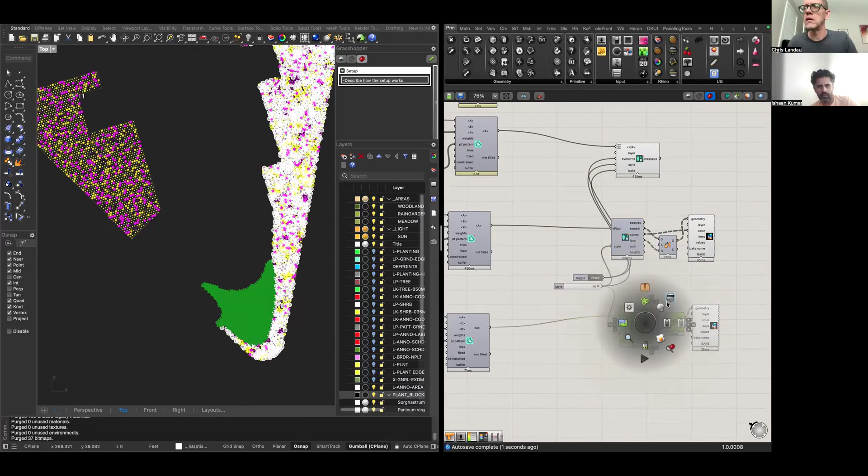So we've got these different colors, I know they're all the same color right now. If you want to re-download the CSV, just replace it. I changed the colors. Yeah, and you can do the hex values too. I totally did that. Download. Does it need the numeric pound? We'll see.

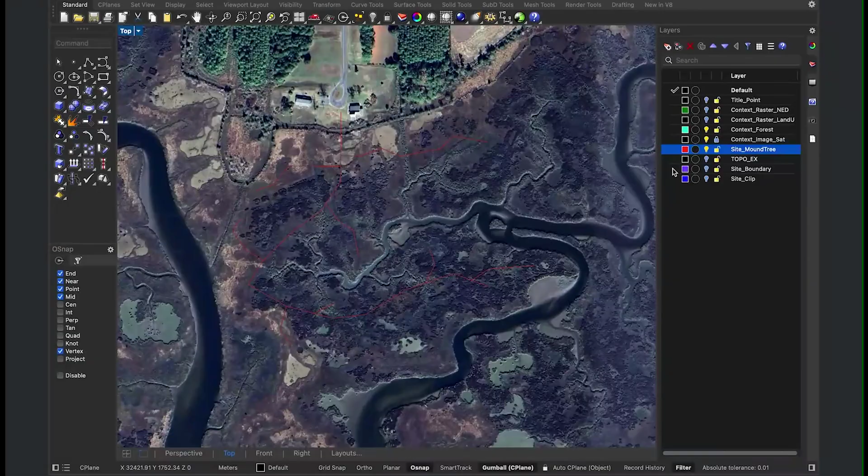Welcome to Kit Crashing, where we explore landscape architecture tools like 3D, parametric design, and AI. This season, I'm joined by guest host and landscape architect Ishaan Kumar. Ishaan brings the challenges, and I tackle them live, using computational design and my plugin, LandKit, to create better workflows.

Good morning, Ishaan. Hey Chris, good to see you again. You always catch me on Thursday mornings every other week. As you know, I get out of therapy, so I'm very zen today. My therapist asked me, 'Who are you?' Which is a very profound conversation, not for this space. But one of the things I said was, I think I'm a culmination of moments, and we're talking about legacy and what you leave behind as a father, as a person.

I just really appreciate this space, a moment shared, working in Argentina remote. I just finished a big deadline and I was looking forward to this, a space to connect with someone. You hit a milestone and there's no one to celebrate with, no one to grab a beer with, and this is just a nice space for me to learn, and hopefully we create a buzz around a community of people learning faster methodologies. So thank you. I'm excited for our shared space and the fact that we're sharing that with others, and that feels really great. Also, the sun came out this morning, so I'm feeling happy, and I've been cooking a lot lately and just feel good.

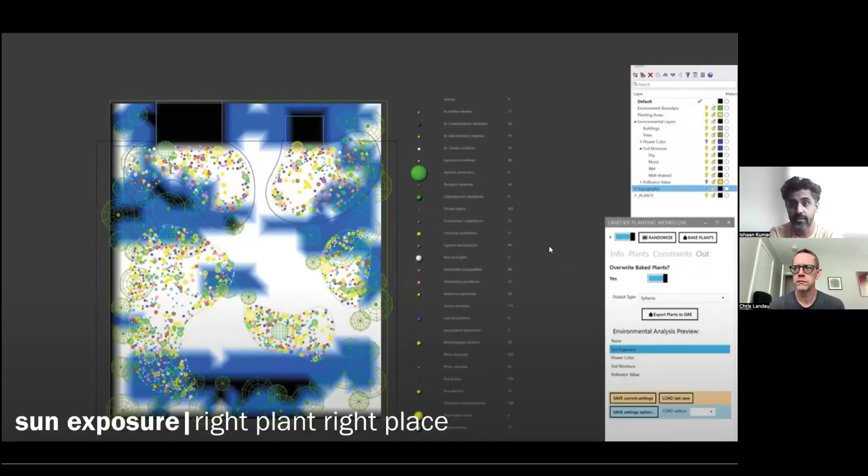I think it's fascinating that you guys have developed this, and you could base it on hydrological conditions, flower conditions, expand it to fragrance, fire tolerance, pollinator values. I'm not going to dwell on that because we cover it in the onboarding workshops, but it's incredible that you've opened up the conversation to where we are today in design.

I want to use this session to critique the way I work, the way I have worked, the way I've seen other people working. This is a far deviation from landscape with curated hedges and beauty, or monolithic blocks, or placing plant by plant and calculating how many of every plant there is, then updating a schedule, then the path alignment changes in CDs and you have to go back. I think we're way beyond this, but more and more clients are asking, inspired by this naturalistic look of Piet Oudolf and other active practitioners.

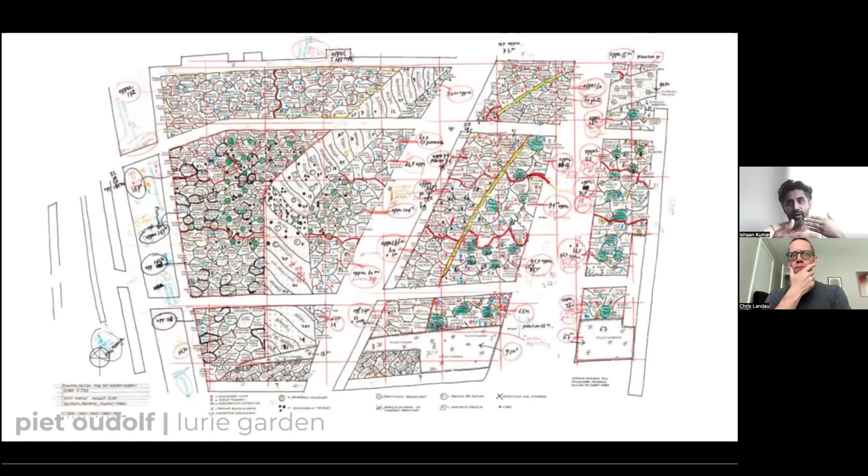But this requires another level of elevated plant knowledge, where the layering of one plant with the other matters. Piet, the way he works, prints out these plans to scale and knows that this blob is X square meters and it's going to have that many plants. These plants are beautiful, but they require a very high, elevated level of understanding plants and design. And I don't have that.

I'm trained as an architect. I went to Penn, I've worked at various firms that work in different ways. One of the things I've picked up is not necessarily learning a catalog of plants, but thinking about planting design as communities and mixes. This is something you and I have talked about. Looking at these images by firms that I admire, you could start to see patterns of mixes and zones that are trying to replicate natural conditions.

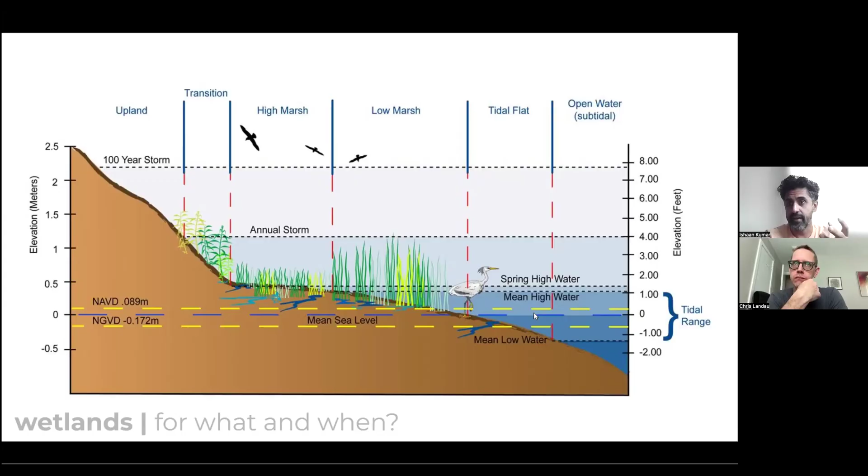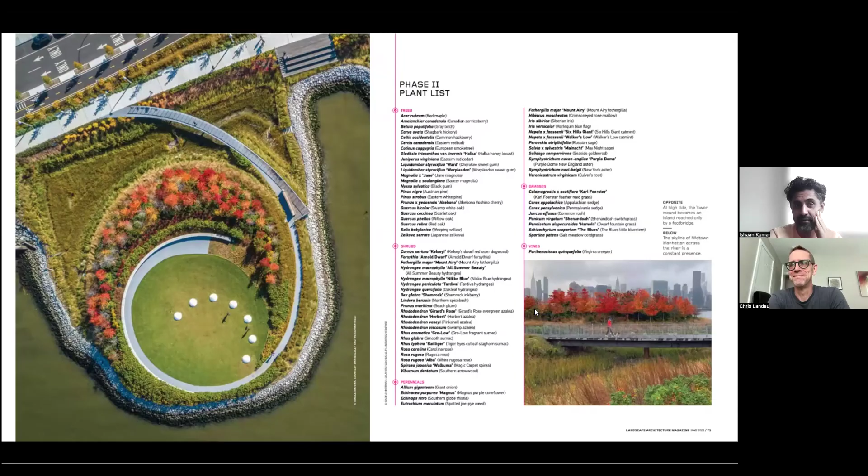As I said, I'm not the plant guru in the room, and someone once told me smart people steal from other great designers. I collect great plant catalogs of projects when I find them, and use them to refer back. This is one that I like to use in New York, where it has different zones, and each eco type has a mix of species - this becomes a resource.

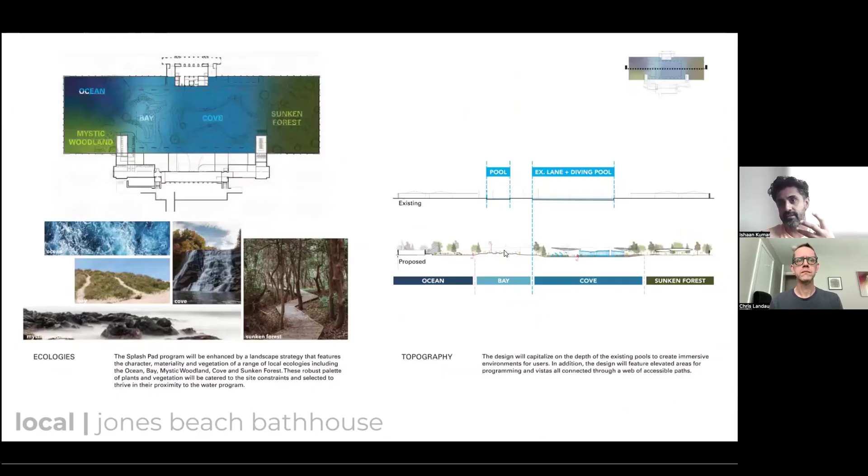This was a project I did at Local, understanding where it was in Jones Beach - understanding that it's near a salt marsh, a dune forest, a dune shrubland - and trying to bring those into tying that to the program, and tying that with a look and feel for the program. So this is the way I like to work, it's always in mix.

Today I want to focus on another Local project - this is almost like doing my homework for me. In this project, we're now in Nassau Community College. There's a bunch of existing trees, beautiful tall pines that surround this triangle.

The great thing about Nassau Community College is it has the only remnant of the Hempstead Plains grassland - the only grassland that exists today east of the Appalachian Mountains, and has very rare species, and it lives within Nassau Community College.

What I wanted to do in this project is have a series of mixes tied to the conditions that I had - pulling the Hempstead grasslands into this triangular plaza, doing a woodland mix under the trees, and then I added a rain garden as well.

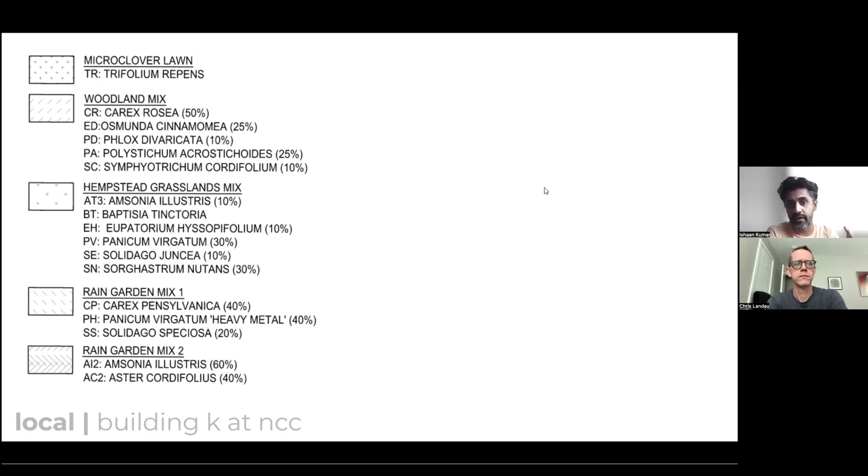At Scape, I learned Land F/X, which I think is extremely powerful because you get to delineate areas and say, okay, this mix is going to have X percentage and it's going to have this triangular spacing, and it gives you the quantity. So as the blobs are changing throughout the design phase, you're never updating the quantities.

This is something I've grappled with LandKit - I really value the right plant approach, but I also see the value of the mix. I think elevating this conversation to make it more transparent for me how to do that would be great, because it's been a doubt in my head, how to connect the dots. With Land F/X, you could set a zone and it gives you that quantity within that area.

And we're not - I think in our conversations you made it very clear that we don't want to be Land F/X, we don't want to replicate what they're doing. You guys have already worked with them, so maybe you could elaborate a little bit on those conversations that you've had with them.

Yeah, we've talked to them about some interoperability, because what we're trying to do is be a computational design tool, a placement engine, a tool for bringing analysis and planting together and thinking in terms of a holistic approach to planting design that can be scalable at larger systems, and even work at smaller scales depending on how you're working.

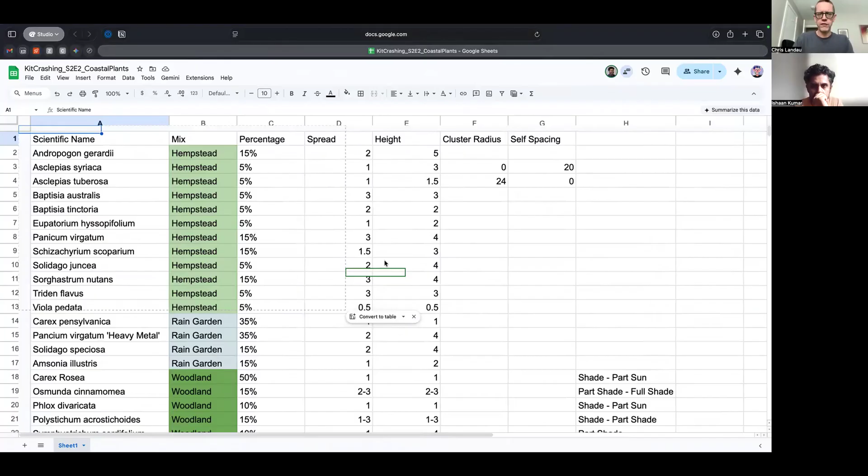So let's first have a look at the database - there's a couple things. If you want to adjust amounts for the mixes, these are our mix names, and the way we do that is we call it weight.

And then the only thing you need to do is remove these percentage things, right? I think it may also just get rid of those, but to be safe I'd just do that for now - if you could help me remove those.

And then spread - yes, that's going to be the full spread of the plant, the diameter. Is that the number you were using, or I just want to make sure you're not using the radius. Okay so yep, spread is going to be the whole diameter of the plant.

Just adjusting my video here. The one thing to look for is like this here - this is something you really want to watch out for. See what it did there? It turned it into a date.

You talked about something like that in a video and I didn't remember - it was something with the parentheses, that's right. And it's going to seem to our viewers like we just talked about it, but that was last week, so let's give Ishaan some credit. So what we're going to do is, instead of 2-3, we're just going to add parentheses here, and what that will do is make it so it's not a date anymore.

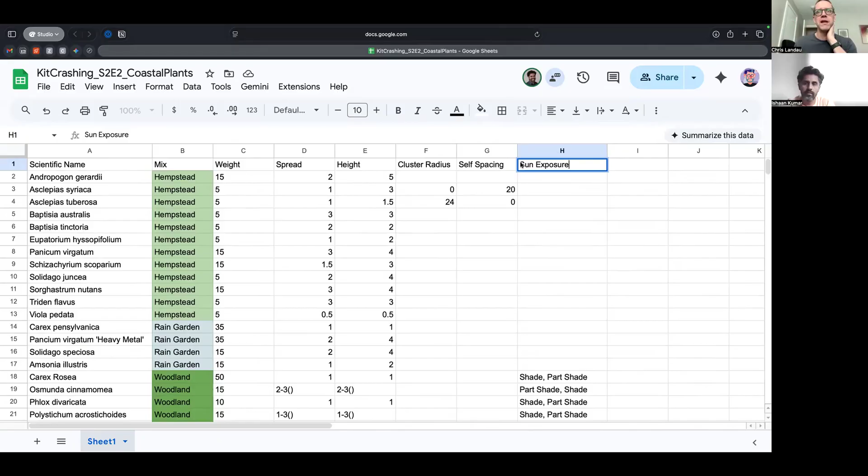Cluster radius is generally going to be the radius of the cluster of plants, and it basically creates a slight circular plant shape - it does diffuse the edge a little bit. If you want this clustering effect, it's going to be approximately this size, and it's always circular in form.

It is circular, but if you have a few of them, they're blobbing together, so sometimes you can't really tell. But if you want a really specific shape, that's when you begin to draw shapes and say put these plants in those shapes.

But the way we can think about it is if this plant wants to be basically edge to edge, those plants are going to be 20 feet apart - that's pretty far, like a tree. The spread of this tree right now is a very small tree.

No, they're all grasses and perennials. So if this wanted to, let's say we want to space this out and have 1 foot between the actual plant radiuses, between their circumferences, it would be one. Otherwise, if you have zero or nothing, they're going to pack together edge to edge. The neat thing is you can plant them according to their max size, or according to a smaller size, and then when they grow, they fill in more later. So there's different ways to approach that.

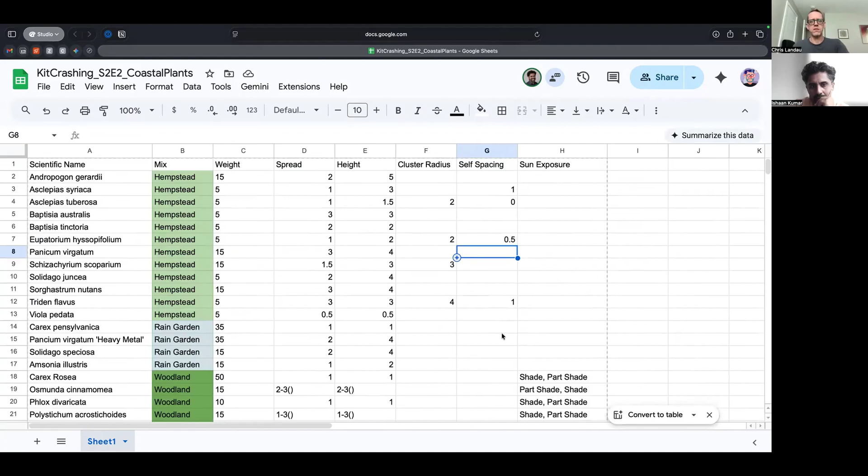So we can also iterate this, right? We'll probably go back to this database and be able to change it. So I'm going to download this as a CSV file.

Downloaded it to my folder. I'll pull that into my folder and keep the same name, so if I download it again, it just replaces it. And then I've opened up Rhino.

I'm calling this Coastal Hypernature. We might change the episode name, I don't know, we'll see. I kind of liked 'controlled mixes' - that was another interesting one.

So I'm just dragging in your L-PL, your planting plan. I have a few options - I can open the file, import it, or insert it. As we said last time, typically I like to insert, but I'm assuming this is just some boundaries.

Yeah, with hatches, so I'm going to import it. I'm going to be in inches, I imagine. Well, the file I'm bringing in is in inches, is what I'm saying. And then the layout units are, I guess, in...

Feet, right, to match the spreadsheet. Yeah, I think so - I think that might have been where we went wrong the other day.

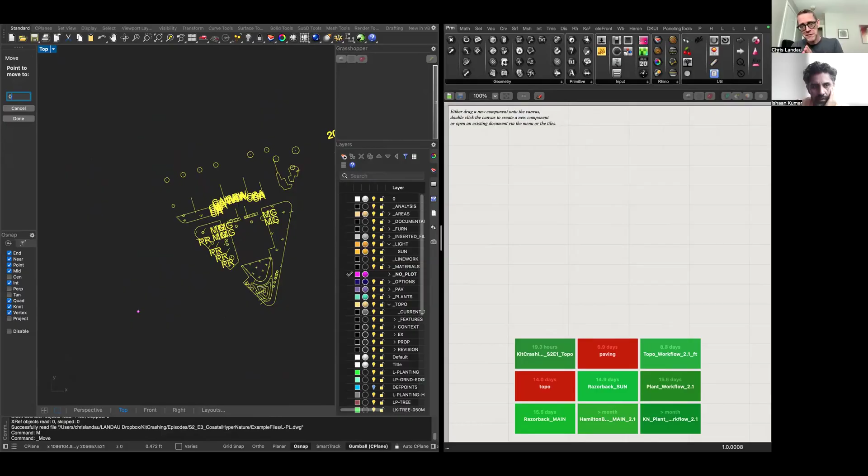So zoom out here - wow, where are we? We're over here. So typically what I would do is take all this stuff and move it closer to the origin. Do you mind if I do that? No, not at all. So I'm just going to do a move from about there to 0. If you just type 0 for a point, it's going to know you mean 0, comma 0, comma 0.

So if I now go zoom extent, I have this zone. What I'm going to do is select each of these. Let's just say this is woodland with some existing trees and blocks. This is the grassland, the meadow, and let's just make all of this the rain garden.

So let's work with those three areas. We could just draw blobs arbitrarily after that to show it in other areas. So I'm going to change this to woodland.

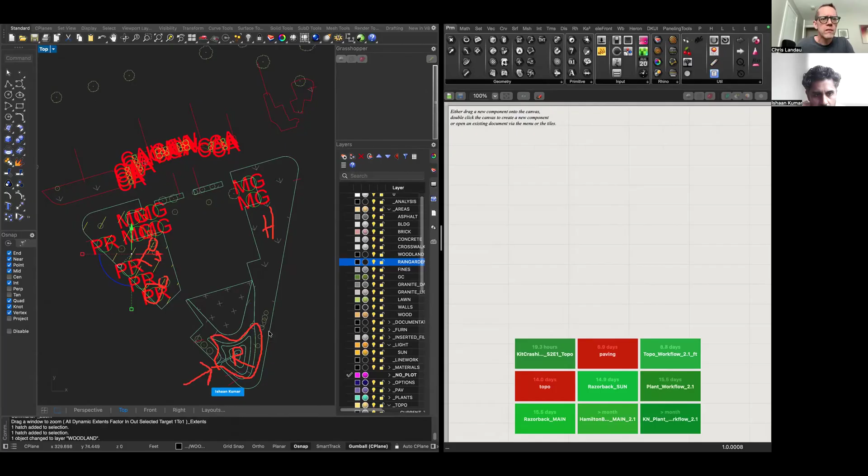And which one am I? Sorry, I kind of missed it. So woodland, and rain garden down here. And you have a hatch for that?

Yeah, you do. Okay, and then this one - that's lawn. This one with the H over here is the meadow.

So you only have three zones, only one zone of each, right? Yeah, and I think for now that's enough to start - it's good to visualize it.

What I like to do is quickly change my colors, so I'll show you how I pick colors with the color picker. I'll apply that, and then do my rain garden, which will be more lush, and then my meadow, which will be more tawny.

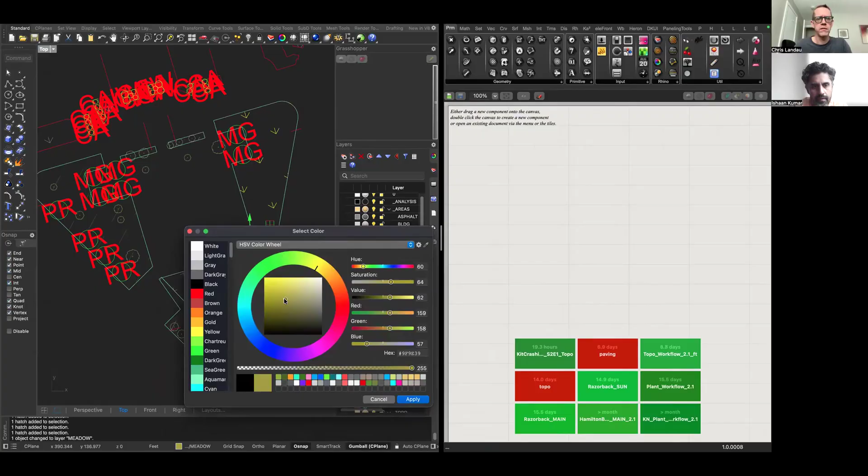All right, so I'll take all these elements and select them from all the layers at once. I'm going to go to the properties, and under my hatch properties, I'm going to make all these solid.

It looks like my rain garden doesn't quite fill in here. Is that curve correct? It was like a gradient tied to elevation. That could be another parameter. I would just draw a line there and curve boolean the whole thing.

Okay, so I'll do that. I'll do a line here for now. Or is that right? I'll just do it, close that up, and we'll use that whole zone.

And then what I do is I take these hatches, and if you explode the hatch, it becomes a surface - that's why I make it solid. If you explode a hatch that's got all the little pieces, it gives you all the little pieces, which we don't want. That's not helpful to us.

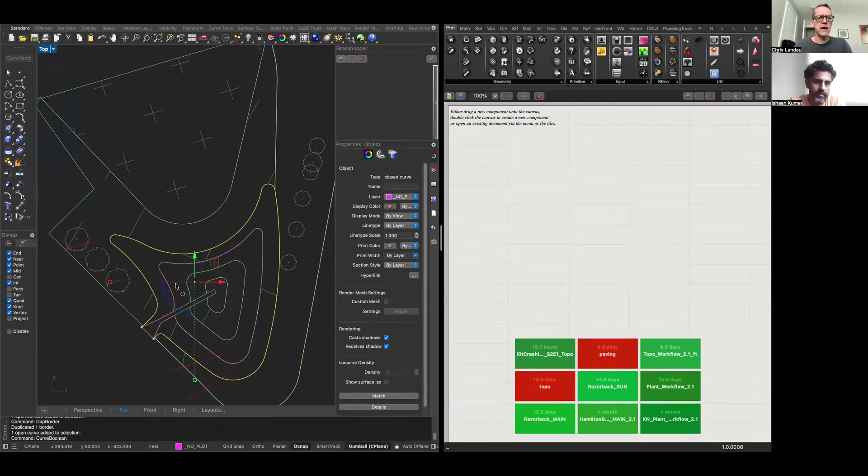So then I can take this and say dupe border, dupe B, and then I'll take this curve and do what's called a curve boolean. I can click where I want to fill in, hit return, and now I have a boundary.

But I'm gonna catch up and delete some of these things. So I'll delete this, delete that, delete this, and then now I should have one clean curve outline. You know what, maybe I deleted the wrong curve. There you go, that one - you want that one.

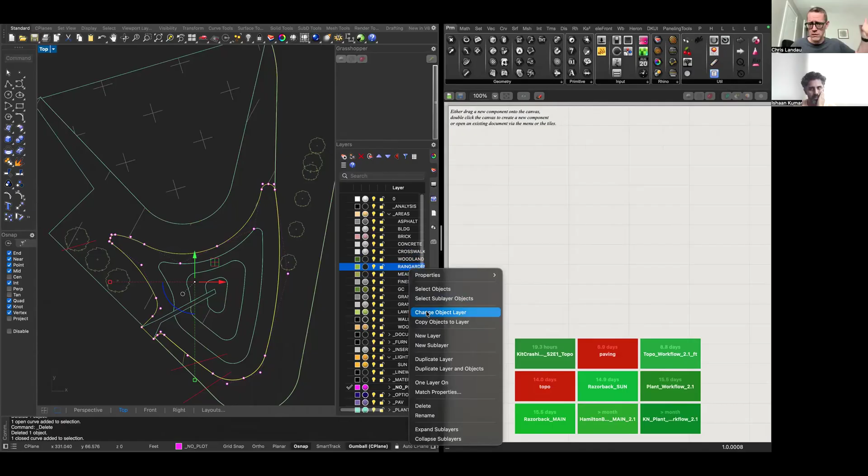Delete these, delete that. Now I have this. Okay, so I'll put that on the rain garden layer. And the other neat thing is that I can use a closed curve or a surface for an area, right? This is the same as we did with paving - change object layer, okay.

So I think now here I would think about it, more the way I'm comfortable working would be with curves or outlines, because then those shapes you can change instead of trimming the surface. Right, the neat thing is I can select my meadow - I like to be on the layer just to be sure - and then I say dupe border, and then I delete the surface.

Okay, I can do the same thing here. So I take this and go to the woodland layer. I say dupe border, and then we delete the surface. All right, so it's harder to see the surfaces - there's always a little bit of a trade-off.

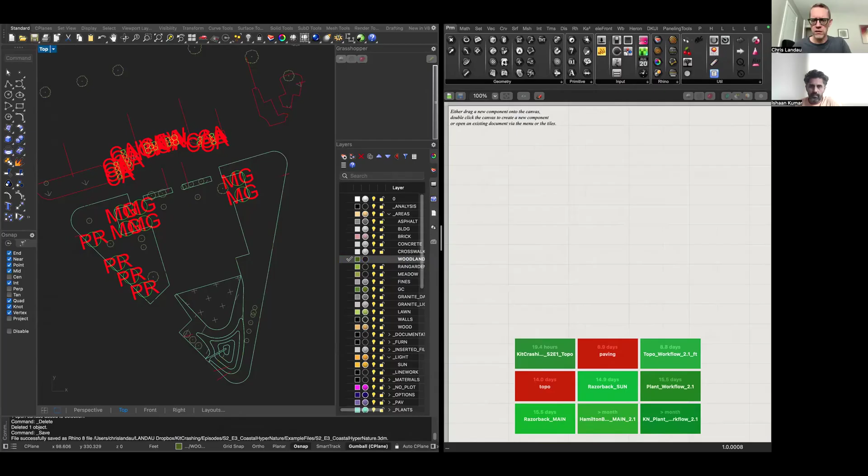There's ways we can fix this. So I'll hit save, and then I'm not sure how useful this is - no, I'm not going to use that. Oh yeah, I don't need all this. Delete all this. Phew. And then, have you guys ever seen these?

You can actually say delete placeholder. I didn't know you could right click and delete them until recently. But those are usually placeholders for a plugin you don't have installed currently, and that was just like an old version of Elefront or something I had in there.

So what we'll do - it's like, where do we start? This is sometimes how I feel like I'm just crashing into a project, right? This is one of the reasons it's called kit crashing. I just start to say, what do I have and what do I need to start doing? So I have areas, let's start there.

So we say, you know, we're going to do a layer pipeline, and then I'll do two forward slashes to get my panel outline going. I'll do my underscore areas, and then the two dashes or the two colons, and then I do a wild card, which is an asterisk. Sorry, that's so small, let me zoom in here.

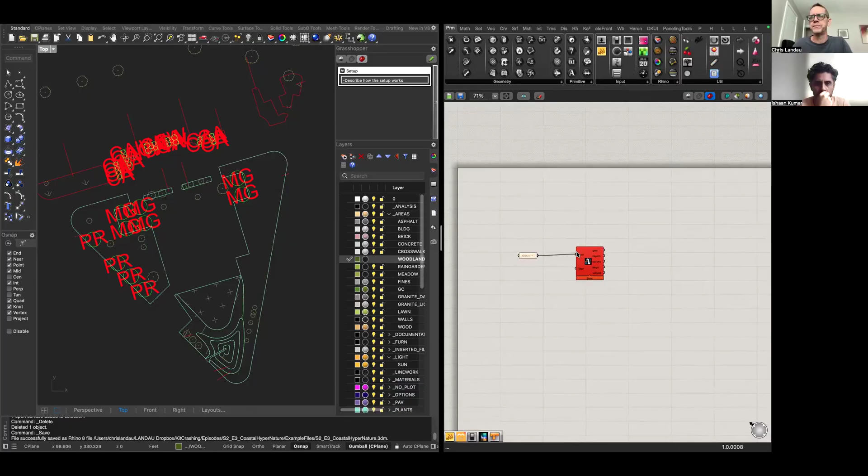I plug this in, and you can see that if I hover here, it brings in a bunch of stuff. It looks like it's bringing in a bunch of points. So just like with my template from before, I'm going to say show - I usually do this to clean up the file.

Yeah, let me try again. Show, select all these areas, select objects. Yeah, there's a bunch of points somewhere - oh, they're down here, somehow they got moved over here. Delete those. And now when I zoom into my pipeline, I only have three closed curves, which is the curves that we have in the plan.

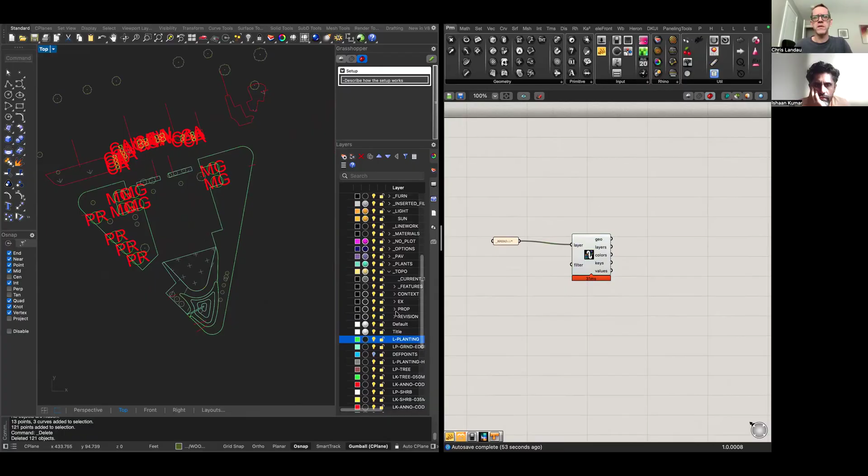Do you want to just turn off everything else? Yeah, we could, I guess that's a concern - it would hide it pretty well. Let me see. So because of the layer templates, the way I have them set up, all of the new CAD layers are down here, and I'll just turn them off. And now I see only the three zones. Perfect.

Yes, save. All right, I can do a quick visualization. I can say create an area, and then get the area stats.

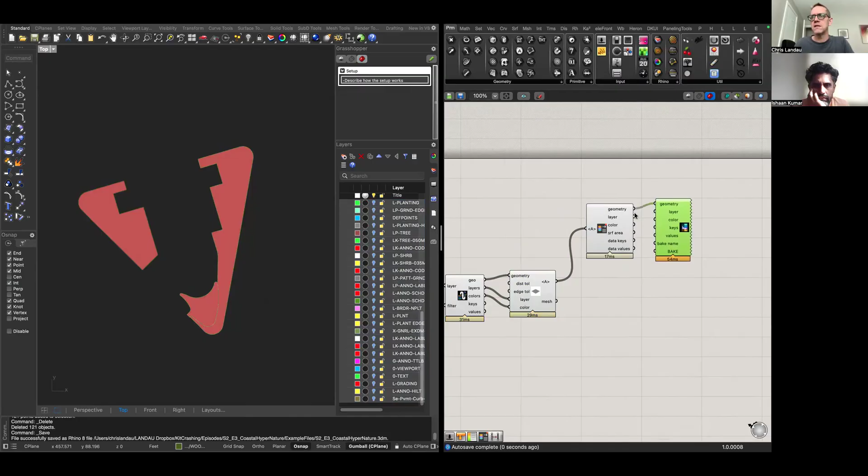There's a few ways to do this. I like inputting the data into the area and making sure it has all the data it needs. Then I can say bake plus, and visualize this as a color, and hide all this. So now I have the surface, these areas visualized.

So if I'm drawing on those layers and just doing the curves, as we said, I'm seeing those changes. This color is pulling the color of the layer here in Rhino. Yeah, nice, that's really useful.

This is one of the things we really liked about the layer pipeline idea, that we could pull certain things that are getting used all the time, like we're always using the layer name and the color name. Even with the new Rhino, you need a couple different components to pull all that information out of any given geometry. It just was heavy. So there were some reasons we did the layer pipeline, and that was one.

The other thing we did, as I said in the last episode, the paving episode, we could put collage in this area. So we could have these things layered and have shapes that are then being collaged according to their placement in space. We're not doing that here though, so I have these different areas and I've created the areas.

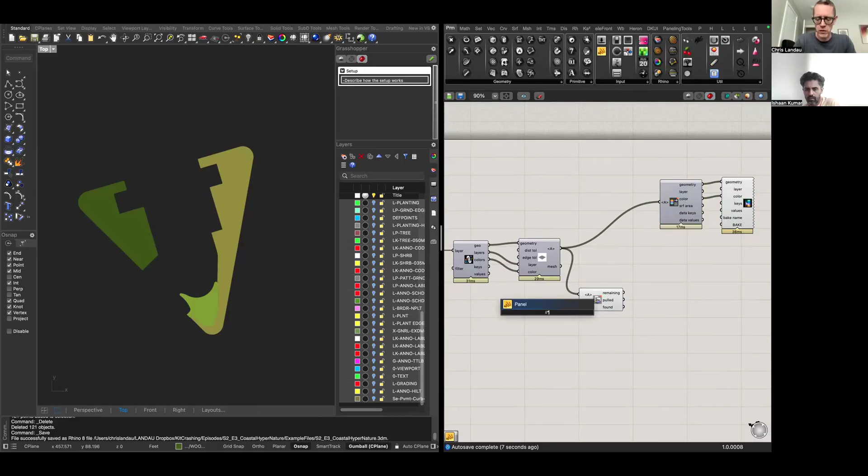Now there's ways that I can pull these now that they are areas. I can pull them by name. So I can say, okay, all the ones that are called, you know, wildcard. I think this should work. Meadow will go here.

Yeah, so it needs the asterisk. The asterisk says anything that happens before this doesn't matter. All I want is something that has meadow in the name at the end. You have to be careful because if you have your meadow layer somewhere else in your file structure, it might bring that in too, so that could be a problem. The other way to do it is just to say, to be safe, we're going to do underscore areas, two colons.

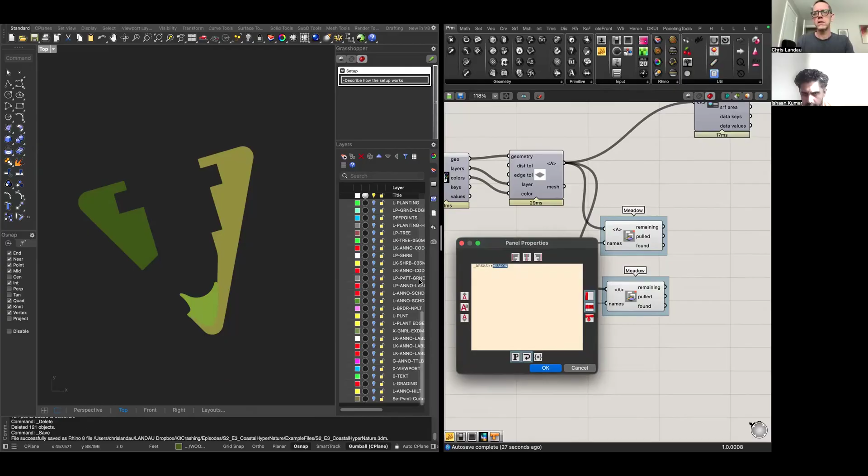And then I'm also going to group this, Control G, and just type meadow. We have it here, but sometimes it's nice to have the extra label so we know what's going on. So I'm going to do each of these. We'll do meadow. Did we call it... I think we called them meadow, woodland, and rain garden. Yeah.

Can I derail you for a second? Yeah, absolutely. Let's say I wanted to visualize the area, is that something that would be a key? What do you mean? Based on this outline, if we wanted a label there that said the area.

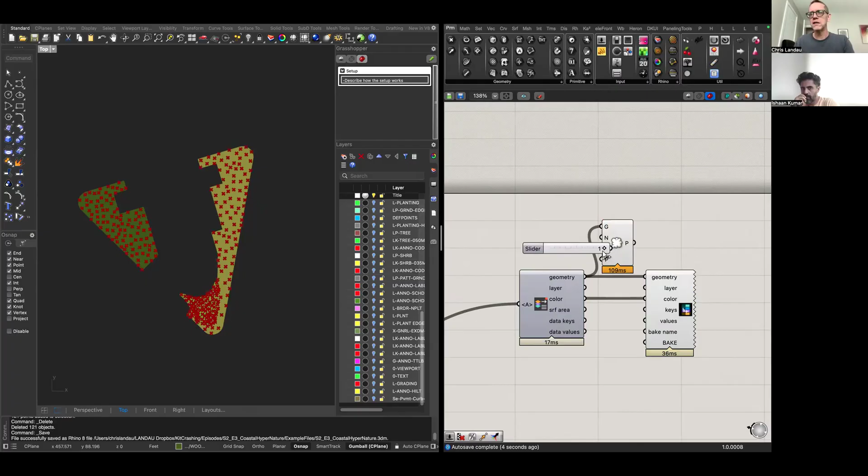So we can say populate the geometry. The typical thing you would use this for is populating with a lot of points, so it fills in 100 points per area. But if you just do one, it puts it somewhere on that shape, not necessarily right in the middle, but it gives you a single point.

And then we could say create text. We have this new bake text component, which I really like, obviously for my reasons. Then I can pull in the layer here of the text and plug this into the planes.

The one thing to watch out for is this is what's called fancy wires in Grasshopper, an option when visualizing things, under display, draw fancy wires. If you have a grafted tree of data, it's going to show the dotted line, so you can see here this is multiple lists of stuff. It does that because if it were 100 points, you'd want the 100 points for this branch and 100 points for that branch. But in our case, we know it's 1 point, so we can flatten this. I can right click on that output and say flatten.

So now I have one text per plane rather than three per branch. And then I can say that I want it to be white, and that it's going to go on a layer called ANNO—it could even be L, area, something like that. So I'm going to plug that into the layer, but also into a bake name, and the reason we do that is that every time I change it and it's baking, I want it to overwrite the old bake name. That bake name needs to be really unique, but because I know I'm just using this layer here, I don't need to worry about the uniqueness of it.

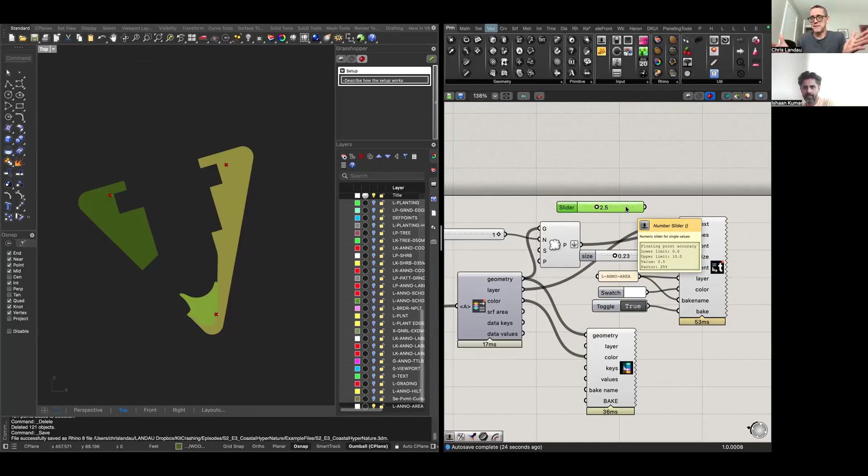So when you're typing the number, the level of fidelity is going to be based on the number you're typing in. There's ways to change the slider settings, but I like to do that. So I can change this and make this a little bigger here.

I'm really getting into the weeds here before we get into the actual planting. But no, this is useful.

This is another tool really fast that is a replace text. So the layer name—we can replace our underscore areas, get rid of all of this stuff, and just replace it with nothing. And then I'll plug that into text, and now I just have meadow, woodland, garden. If I hide this, now I've got these nice labels.

I can also adjust the font here too. So I could say the F is what you're removing, and it's just—I see, yeah, so it's find and replace. Maybe it doesn't have Helvetica. Might need Times New Roman.

And the text—would the surface area be the area of each one of these? The surface area, yeah, it's the surface area. So we wanted the area stats to be a way of kind of getting the underlying geometry, layers, colors, any data that's stored in the area, and then the surface area seemed like a nice, convenient thing to have coming out of there as well.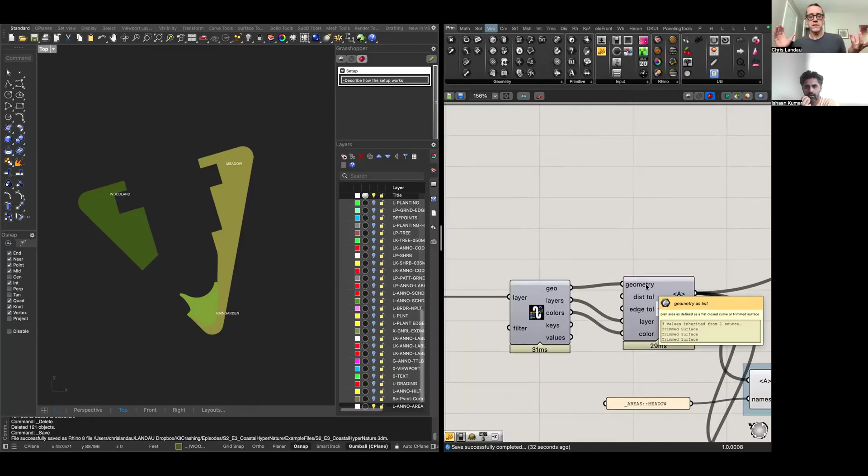What if it's not a surface? In our case, it's a curve. Well, every area—so when you input a curve instead of a surface, it's actually creating a surface. So when we were doing the paving, we were explicitly using surfaces because we wanted to make sure the surface was oriented properly. When it automatically creates a surface out of a curve, you don't know which orientation it's going to be.

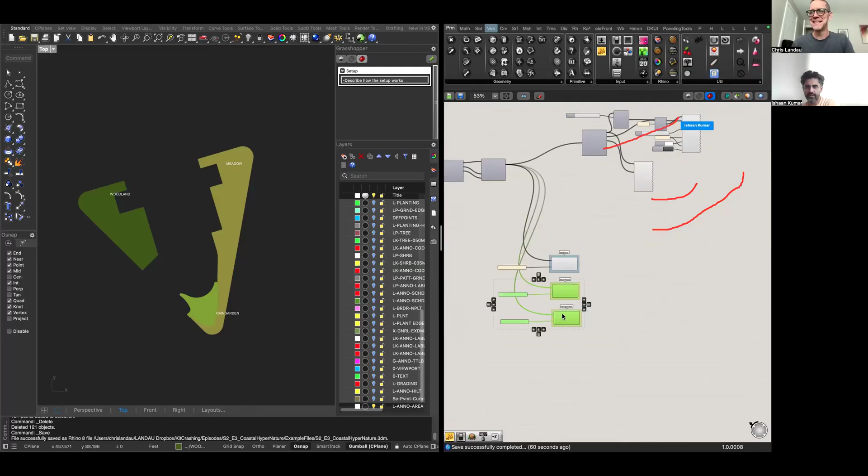So I know that has nothing, well, very little to do with planting. It actually will if we use any kind of patterning, which I think would be nice to use. If we're going to have to keep moving though if we want to get to all these mixes—all right, wait, last thing: surface area to text, that would give you the area of each zone.

So if we plug this in to here, surface area—we could just skip, we don't want to replace areas. So now, yeah, now it gives me a number. That's what I wanted to see. Great, okay, so you wanted the actual area of—

Yeah, because if let's say you're trying to get a certain square footage of planting that you want to have and you want to meet certain percentages, this becomes an easy way to visualize that without clicking and checking area. So this is super useful in terms of design percentages across a plan.

A big derail, but one that is really cool. Great, great, great that you could do this. Again, this is why we call it kit crashing.

So if we have a CSV, we downloaded a CSV of our plants. So I'm gonna create plants from CSV data. If I click on this, it's gonna take a second. Why is it taking so long?

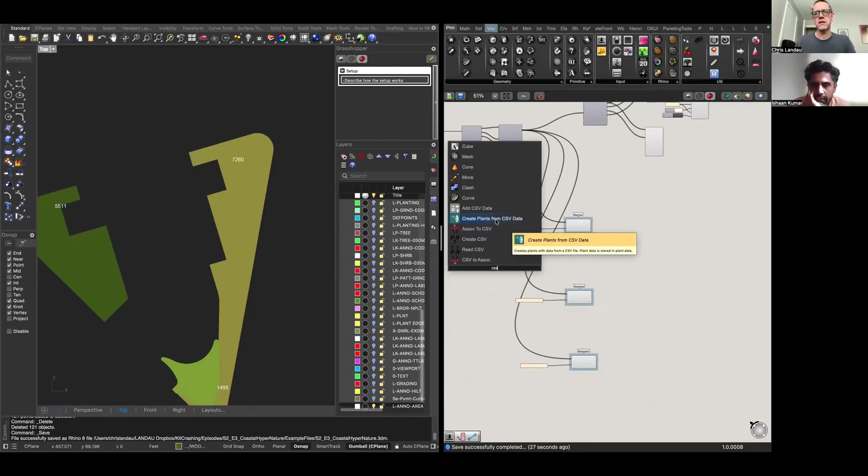Yeah, I think I know why. I think I might know why.

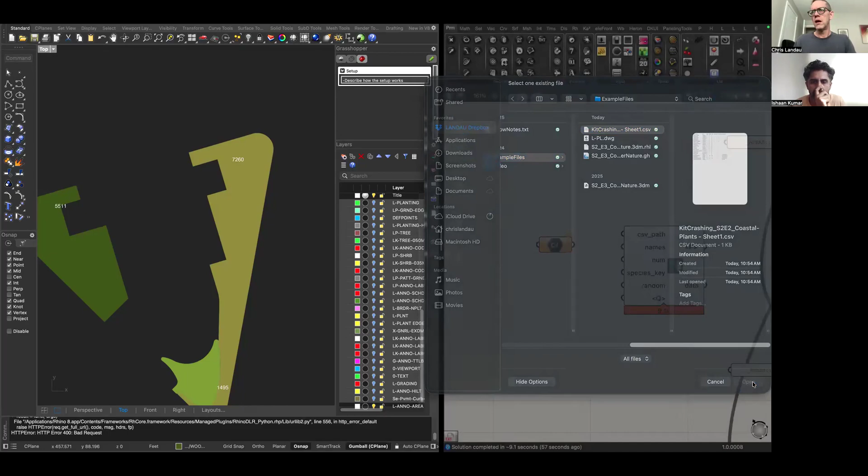We've recently connected an API to it that will bring plants in, but we're going to use the CSV. So what we do is a file path component - this is one of the input components for Grasshopper, like one of these container components. I plug that in, but first I'm going to set the path. So I say select one file, and then we're going to go to Kit Crashing, episode 3, Hypernature, our example files, and we want this CSV file.

And then we'll plug this into here. It automatically brings in all our plants. So all our plants are here.

Let's have a quick look at plants, because it seems like we're approaching this in a way that's new to everyone. So if we say plant data, we're going to get the current plant data. We plug this into here.

There's different things that we can get. We can get all the plant's attributes. And the plant attributes are things that we've either defined or were taken from the data that were recognized as things that can be used as attributes. I'll explain that in a second.

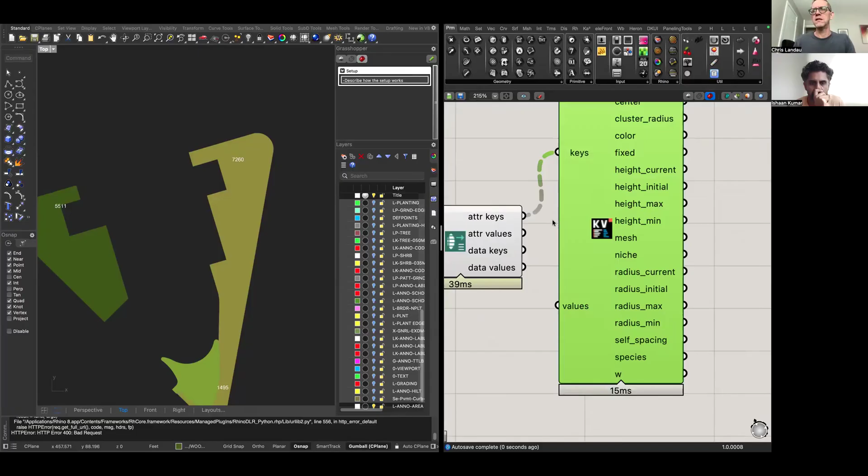So we're going to also do that. This is a new cool thing we've created called sort key values. It's an adaptive component that when you plug in the keys, it automatically creates outputs for all the values. And we plug in the values, and now those are all here.

So I can visualize these by saying, what is the area? There's a lot of things these plants don't have right now, but they do have current height, which has a corresponding max height column versus a minimum height column. This corresponds with that column that we put in the CSV file.

Yeah, exactly. So we have a radius max, a radius min, and that changes for some of these. And then we also have the radius current, which is usually what's used. So if you wanted to change those values, it's usually radius current. We also have W, which represents the weight.

So we have the weights for all of those that you input originally as percentages. The weight is cool because you don't have to do a percentage - you don't always have to calculate it. You could say, well, all these are a 1 with the exception of this one, which I want twice as much, so it's a 2.

And that's nice because if you add another species, you're not having to recalculate all your percentages. We like the recipe method here because you can add and subtract more easily. Species cooking - cooking with plants, which is a healthy thing to do. I recommend it.

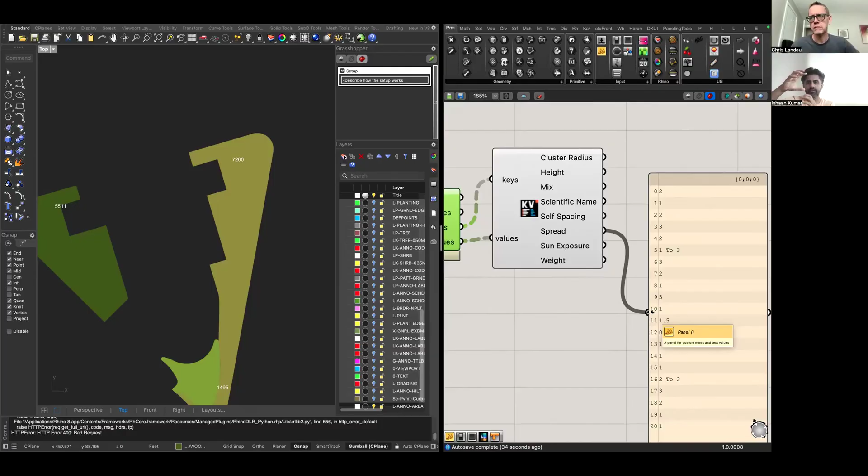Would you have two key value components, one with attributes and one with data? You could, but we're just doing this to look at what's in here, what's coming out. We're not going to pull all this data out, I don't think. There's some interesting things we're going to do.

So we can do this. We can pull, trying to think of the best way to do it. So we can get, let's get the attributes.

Also notice anything that's a range actually comes in as a domain, like 2 to 3. LandKit automatically recognizes whether something is a string or a number or a range, depending on how it came in.

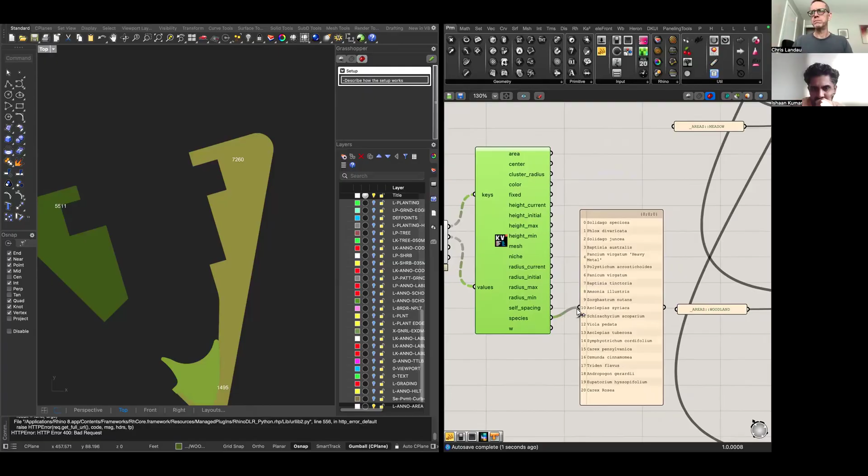That's another nice thing it does from a data perspective. So if I plug in the attribute keys and values, I just wanted to show you the data. And then I say the species, that's the scientific name. Okay, actually no, what I want is not—sorry, I'm messing this up.

It's the mix that we want. So the mix, we know we have this list of 3 things being picked from. There's a couple ways I can do this. Let's say I have a lot of mixes and need to sort this out in a data way. I can say create set, and that takes all of those values and says how many different things are there. What is the set? I can do it that way.

I also think that because we know and we're creating these very explicitly, I'm just going to do it by text. So I'm just going to say rain garden, and I'll say whether this—what's the best way to do this—I'm going to match text.

I'm going to match text. So if the text matches—I'll say I'm going to get a mix, here's the text, and then the pattern that I'm matching is the rain garden name. This tells me whether or not it's a match.

Then I can say cull pattern. So I say, okay, give me the actual plant and use the pattern here. This is going to give me plants that are in the rain garden.

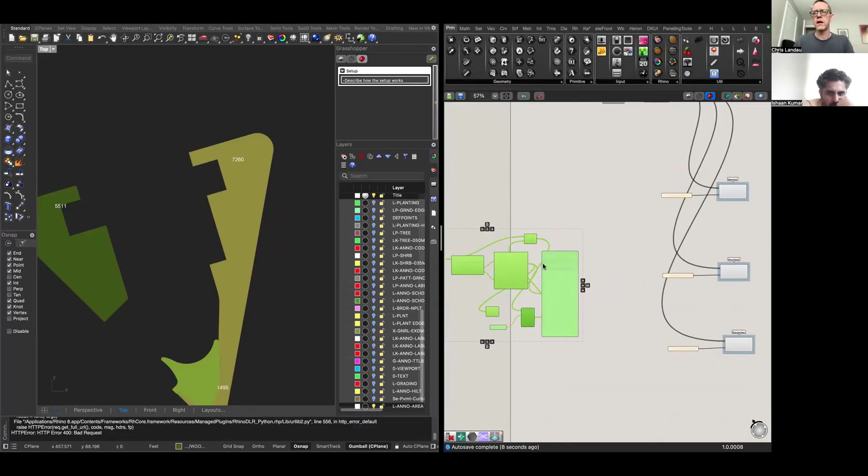All right, so that's a little messy. Let's untangle it. So I'll move this out of the way, pull this up here. We want tight little bundles of logic, right? We don't want our logic to be all over the place, spider and web—we don't want a bunch of weeds in our garden.

If I do, each of these is going to connect in some way to the list. I'm just looking at the order. So now I have these 3. They're in the right order, just so that when I go to grab them later, I'm not grabbing the wrong ones.

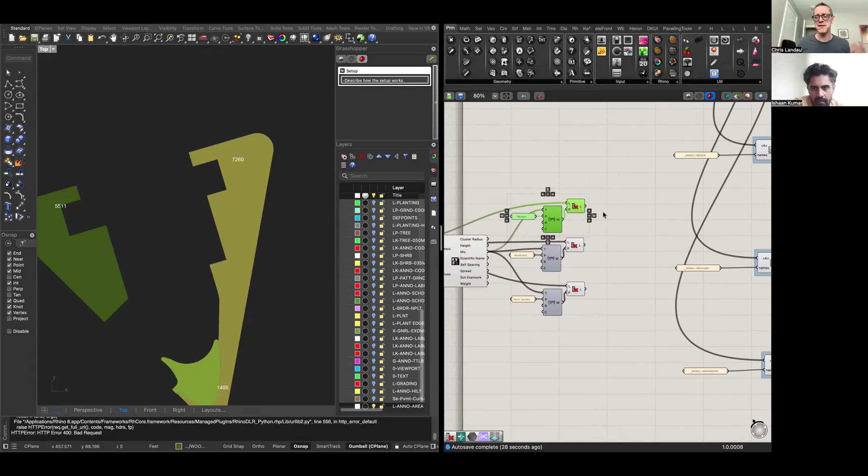So what do we have? We have plants, we have areas. We're done, right? No, just kidding. We need to fill them in with these plants. So let's do the simplest thing, which is to say fill plants, fill the area with plants.

So we take the area, the ones that are polled in each case—the polled area and then the plants. Is this not giving us any matches? That's interesting, meadow. Oh, it's Hempstead. Hempstead, yeah, there we go.

That's something, so it's telling me there's an issue. There's a—what did I forget. Oh, because we're filling with a pattern. I'm actually just going to fill—I thought I grabbed this one instead. I'm just going to start with this.

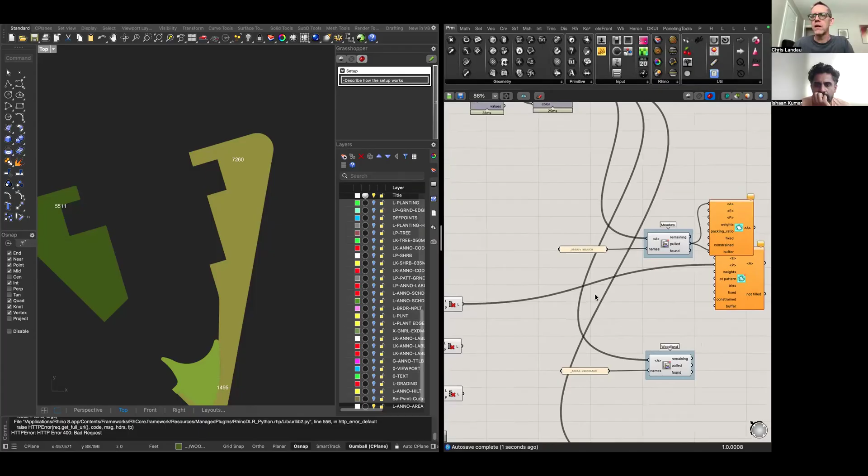What's the difference? So fill area—and it just filled them, by the way. You can see that it took—this is the profiler widget, which tells you how long things take. It just filled all three areas with all the plants. We can't see them yet, we can visualize them in a second, but this allows you to put in a pattern of points.

And then it will fill every point with a plant. So if you have a grid, whether that's a hex grid, a triangle grid, a square grid, or running bond, you can put in that pattern and it will fill. But you need a pattern per area. What we usually do is just do paving and then get the center point of every paver and plug that in.

So that could also work. In fact, because this is so simple, I'm just going to do standard pattern—oh sorry, not standard pattern.

Add pattern to area. So we'll take the area and automatically fill it with a pattern - running bond 2x1. Actually, I'm going to do a hex pattern instead, that's probably a better, more logical thing. And then I'm going to plug in an evaluate box.

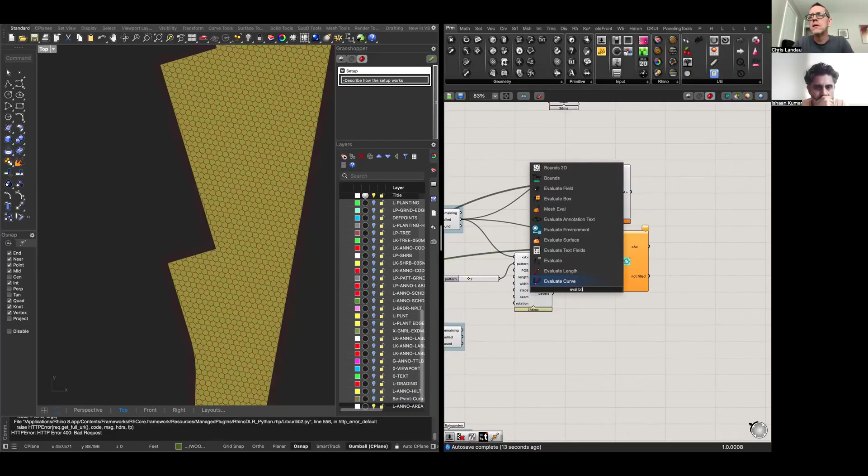That gets my center preferred point method - it turns it into a box and then gets the center of that box by default. Nice, plug that point in to there. It's going to try to fill each point with a plant.

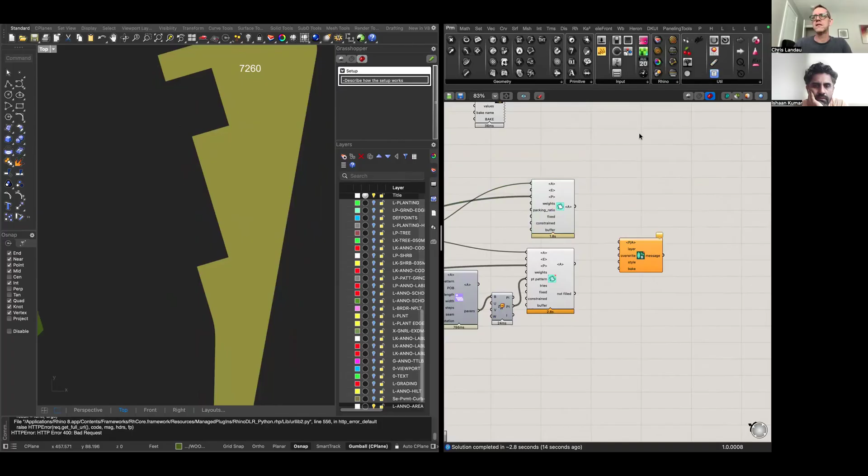So now we have two different ways to visualize this. We're going to jump to the fast way to do this, which is to bake our plant blocks, and we'll plug in the area. There's a default layer, which is plant underscore blocks, but because we're going to have a different mix for each one...

I'm trying to think of the best way to do this. I think it's better to keep it under something generic, because if we have a plant that occurs in multiple mixes - like we've duplicated it because we want the weight to be different, or the radius different because of the species - we don't want it to override the old one when it bakes. So I think having them all be part of one mix is better, because then it will recognize them all as that species name and bake them all at once.

Okay, so we're gonna bake. We need a toggle, and we're going to overwrite, which is true, and then we're also gonna bake, which is true. So what that does is it should...

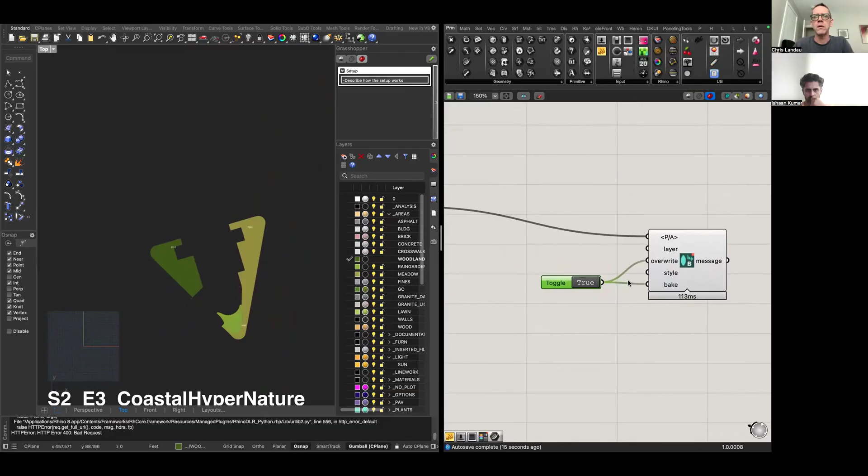Why is it not showing up? It's because it doesn't have a style. Something happened, okay hang on, let me hide this.

Maybe my plant layer is off, possibly - plants, plant blocks. Okay, there might be something odd about our plants, I'm not sure why that happened.

Uh-oh. Okay. Might have something to do with our data, probably has to do with our data. Let me see if I can just try a different block style, let's see if that does it. That did not work.

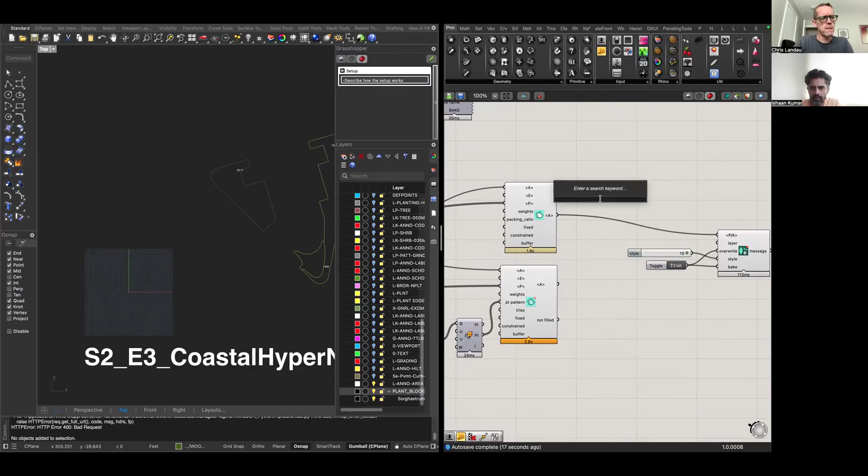Sometimes - let's see if there are any plants here. So we're gonna do, um, let me check my units. Distance from here to here is 52 feet, that seems about right, right? It's a big planting area.

And then let's plug this in and see if that works. Okay, I think it has to do with the actual get plant - get area plants, so I can get the area and get the plants. Let's just see what it gives me - 4,592 plants. So there's definitely plants there, and for some reason it doesn't want to.

I'm gonna just see if I can delete this layer, if that has something to do with it. That is really concerning. I wonder if it has something to do with the plant names, like these quotes.

Let's remove it for now. I'm also just gonna remove the quotes for now. This is one that panicum exists in the meadow too, but it was just a different species. I'm also just kind of looking to see if there's any other data issue here. Just gonna download this again as CSV and hopefully this will just replace.

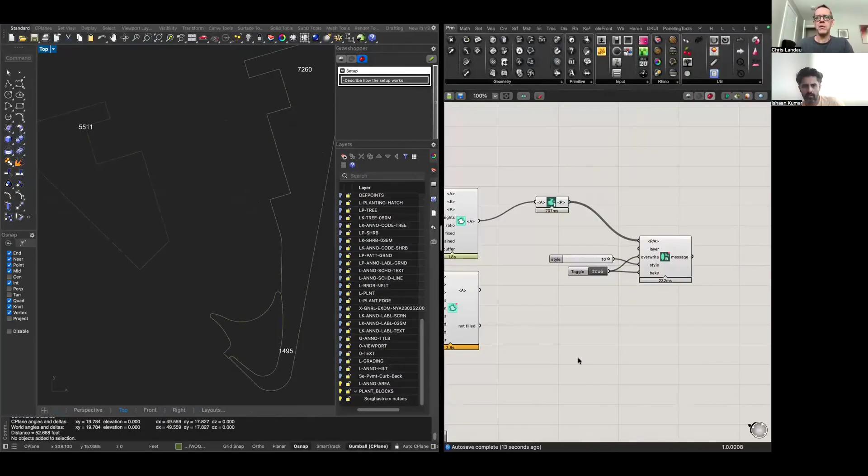Okay, so I downloaded it and then pulled it back into that folder, and it said do you want to replace, I said yes. And then I'll go here and just replug this file path into here and it should refresh, and it's got to place all the plants again. But there's definitely something happening here, which is concerning and annoying.

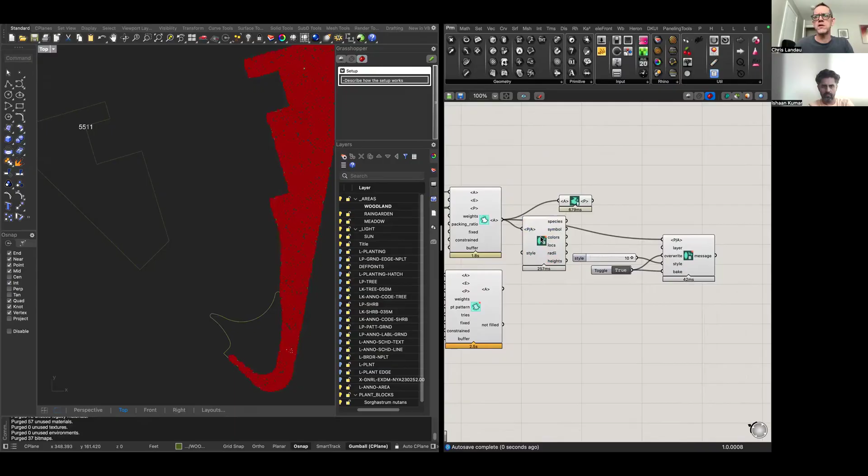I wonder if - I'm going to try purging this file real fast. Very strange. Well, just so that we can make sure we're getting something, I think probably the better thing to do - there's something going on with the bake tool here.

And I'm going to not use this tool for now, just so we'll just visualize everything live. So what this does is it gives you species name, and it's in branches, these data branches. So everything on a certain level is always all the data for that tree. The nice thing is you can do things with it and it lines up properly - our species, our symbols, whatever the symbol style was, our colors, our locations, radii and heights. So we can use those to create things, but the symbol is really the thing that helps us.

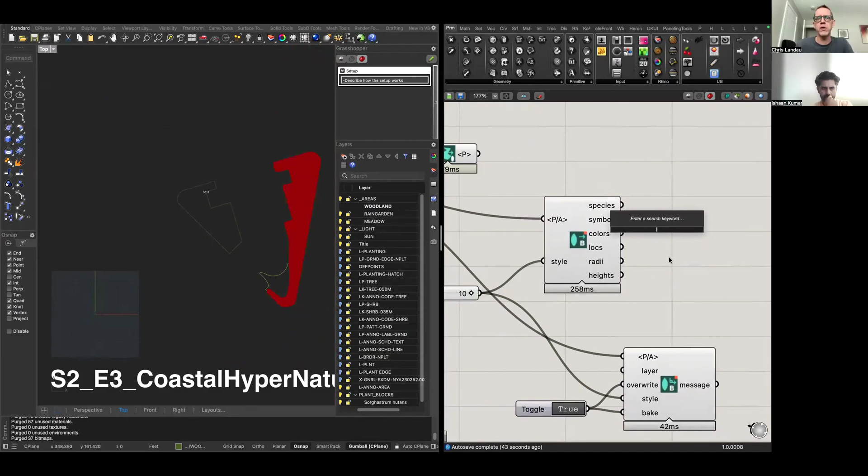So the crazy thing is, for this particular one, it draws the symbol kind of usually in another location. So we're going to say orient.

We orient that symbol for each location. So here's the symbol - that's going to be our starting point, and it's going to start from 0 and go to... not here, and then that places it in a location, right? So now we've got plants.

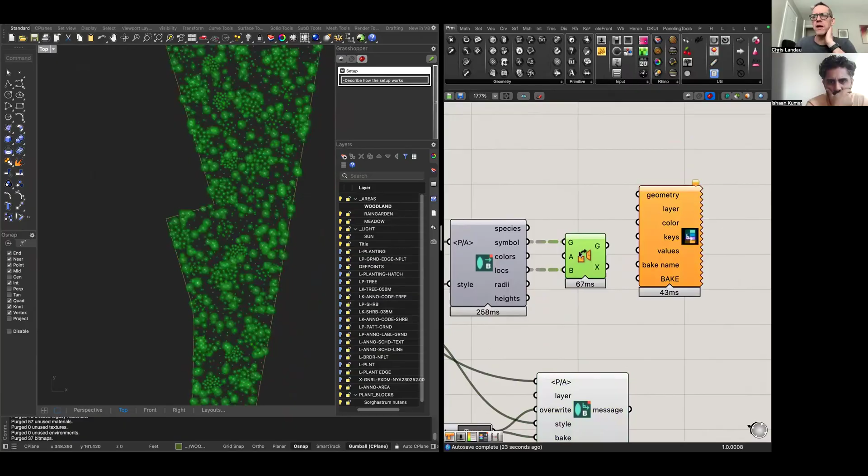I'm going to hide this. We have plants that are starting to be placed here, starting to look like something. Then we're going to do the bake plus preview. I have no idea what's happening here - I'm really curious, I'll have to investigate, but I don't want to take up too much of our episode here to do that.

So I'll take this, I'll do color, um... oh, because we haven't defined any colors for our plants. So we can go here and say flower color, and define a color - flower color, I think it's two words.

We can do hex values for these, or we could say white, yellow - it uses basic colors. I'm just going to do this to demonstrate, and we could always change it later, right?

Now I'll say file, download a CSV file again. So the representation of the block corresponds to what you put in the spreadsheet. Or you can change it in Grasshopper, but in this super case it's useful - you don't have to bring this into Illustrator and then change all these line weights to that color. You can straight up export it.

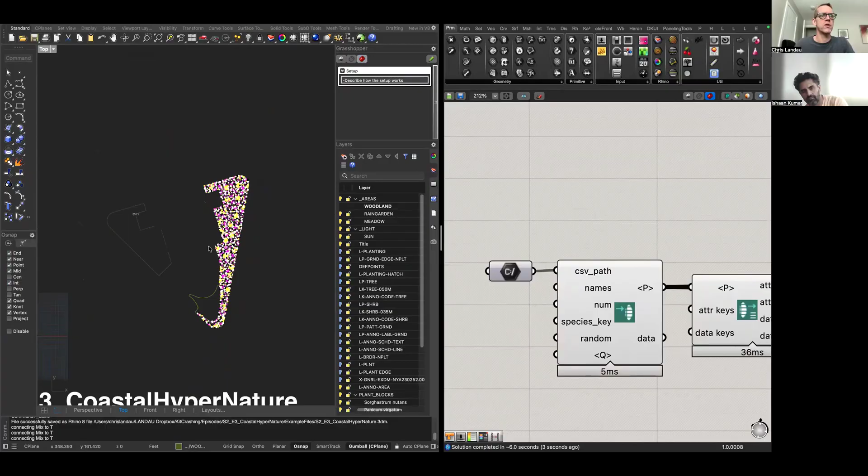Exactly. So I'm going to zoom in here and then replug that. And there we go - so now we have stuff that corresponds with those colors we put in, right?

And you can see that we have clustering, right? And they're circular, but if it's a smaller group, it doesn't seem circular, right? It shifts a little bit. So you can see very distinctively that we have clusters with spacing in a certain cluster, ones that don't, other ones that are just placed randomly.

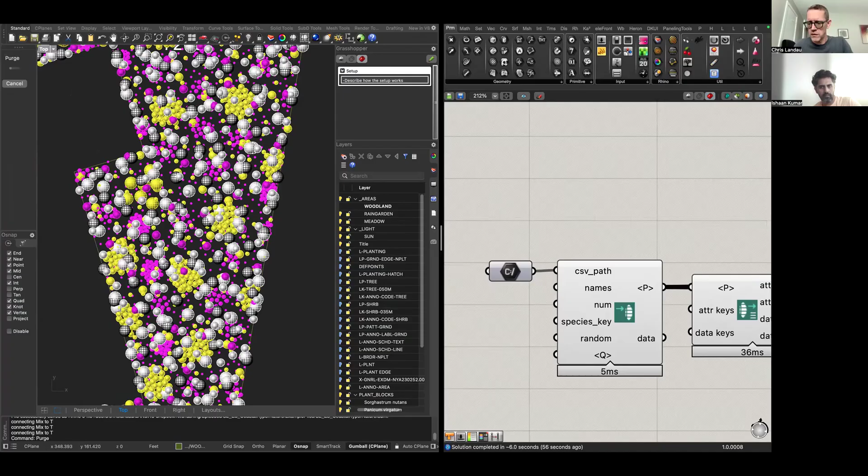So you could adjust your whole mix this way in the spreadsheet, right? You could say, I want these plants to be more frequent, but in clusters, and I want these other things to fill in between. This is very much a matrix planting approach. So even though there are clusters, they're not necessarily going to completely block out other plants - there's a little bit of permeability and overlap between them.

Let me just hide - I like to hide things, even though there's no geometry there. I'm neurotic, I just hide these, and then only the stuff I can see is going to show up, right? So we don't need that, we can hide this. We're not going to use this for now. This is what I like to do when something is not working. There we go, I'll just move it out of the way for now.

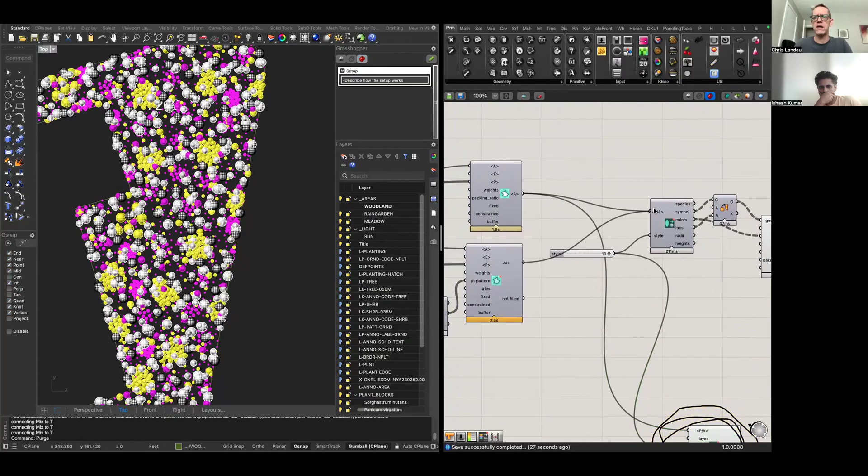We can also see - I was mentioning this idea of a pattern, so I'll plug the pattern one in. The pattern one looks a little different - the weights adjust a little bit differently because we have a set number of points to fill in, but you get the idea.

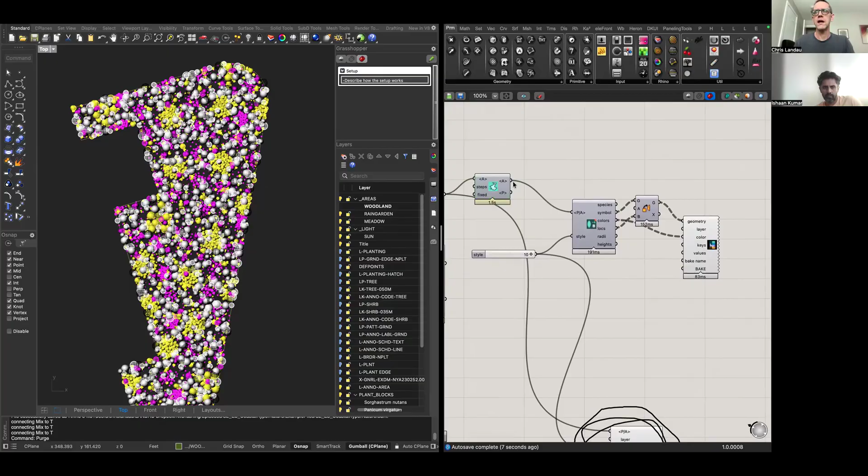And then we can pack the plants here like this. This takes a second because it's running a little simulation as if all of these are balls, and it's saying show... Why is that not updating? Oh, did they actually bake? Yeah, it did.

What the heck, it's actually baking now. Okay great, I don't know what happened, but delete that - we can bake our stuff now. Okay, so the cool thing is, see how these are getting sorted out?

Oh, my mom's calling me.

See how these are kind of getting sorted out a little bit?

And look at this - the sorghastrum is still a black layer because there was no color defined in the beginning. So we'll just make it a different color.

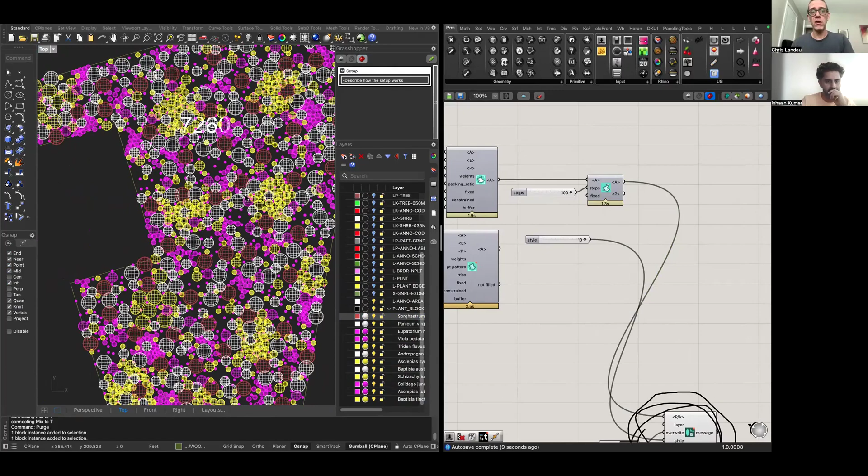So see how they fill in, and I can do more steps. Right now the default is 20 steps. 100 is usually pretty good - beyond that it's slightly diminishing returns. Part of the problem here is it's not really going to fill in all the way because of some of the settings we have.

So I can say fill it in a little bit more - rather than 100%, make our packing ratio 120%, so 1.2. Then it's going to take a few seconds to pack it, and it updates. We can adjust those weights - if we're not happy with the results, we can go and change those weights, change the cluster radiuses and everything else.

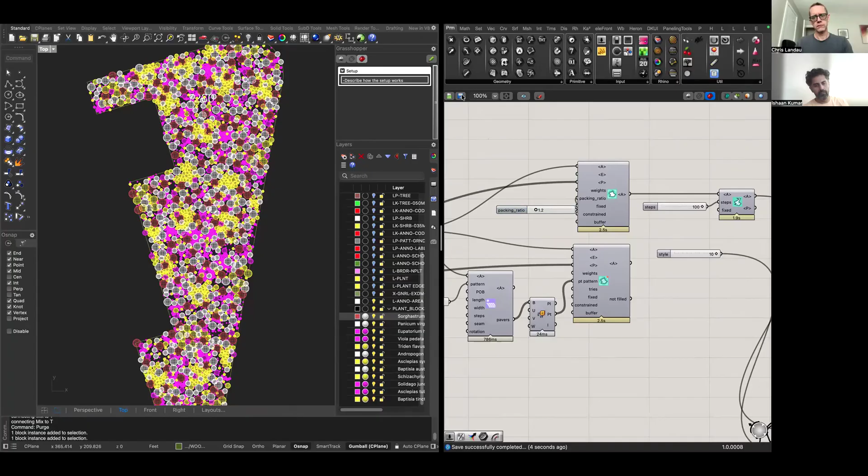But Chris, this is great - we've lost the pattern approach, the gridded layout approach, right? Yeah, which one's using that? We can do that here, we can plug that in there, and now we have that gridded approach, and this gridded approach still has the cluster rules embedded in it.

Yeah, so you can see there. But the problem is that the proximity stuff, like the self-spacing stuff, unless it's bigger than the pattern, it's not going to show up. If I say it's going to be like a half a foot space and the plant in the pattern doesn't even get to half a foot, then you won't see that. But if it does start to get bigger, you will see that spacing on the pattern.

So this, yeah, this is the grid. So if I turn that grid back on, you can see that every single point is filled with a plant.

And if we had rules - like we're not really doing any rules yet, we haven't even set up environments. It's just using, if you don't plug in an environment - and the environment is the thing that stores all the data, like elevation data, sun exposure, things like that - if you don't import an environment, it automatically generates one that's just flat and generic and doesn't have any layers.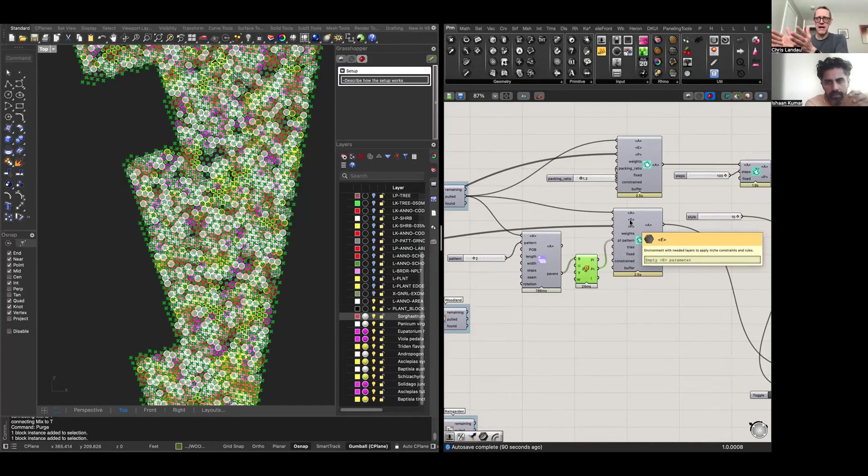So there are no rules in terms of that, and this is the way a lot of people work. A lot of people just want to fill the mix and be able to do this thing. So we've made it a little easier by changing a few things to do that.

I think the reason this wasn't possibly working before is because there was no color values - I think that might be what happened. I think I need to evaluate it. This needs to have, like, if there's no colors, it's just a programming thing I need to fix.

So that's that, and we could very quickly just copy that down to these other guys. So if I say take this, copy, paste - it's going to take a second, it's still filling, it fills them every time.

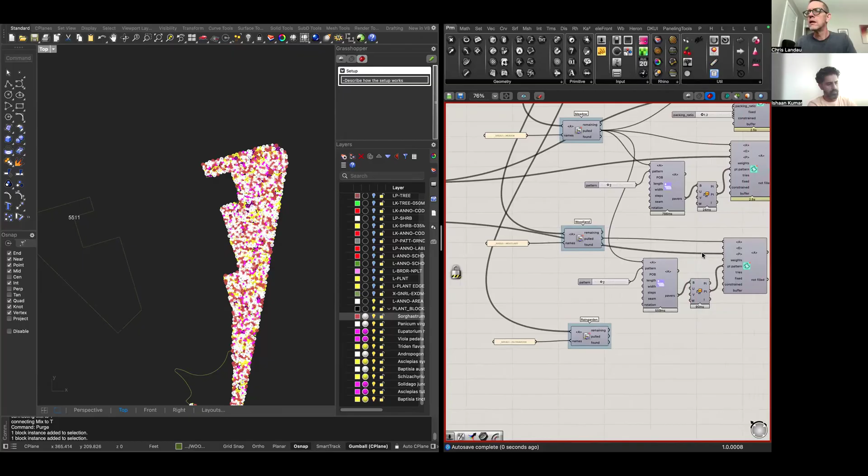So we have a different list - I'm just going to lock it for a second while I do this. So I have the pulled area, I have a different plant list. And then I'm gonna do a merge of my data, and I can delete this now.

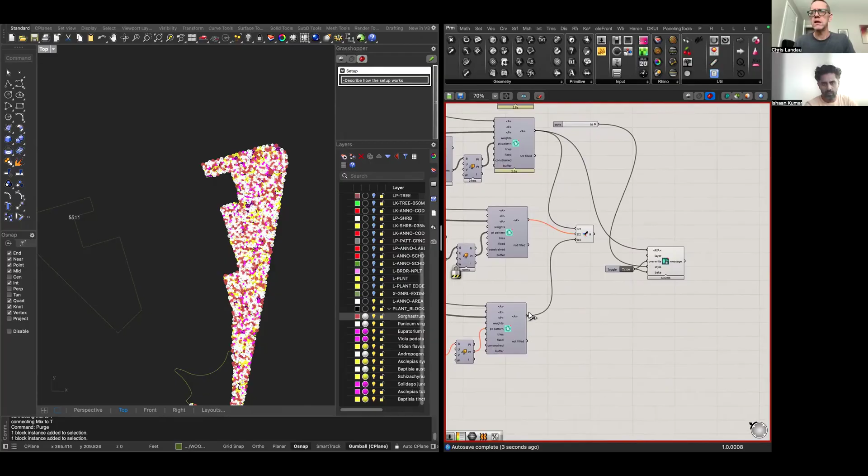We know what the problem is. I'll merge this area, and then I'm gonna copy this and do our pulled area and our list of plants. And then I'll plug this into here, hit save, we'll plug this into here.

So I'm basically saying bake everything at once. So like I said before, if I had sorghastrum in this list and this list, it's gonna bake them both. So then we can unlock and it should bake everything.

It looks like it didn't. I don't know why. So let's have a look here, let's investigate - maybe I just need to plug this in again or something. That's very odd.

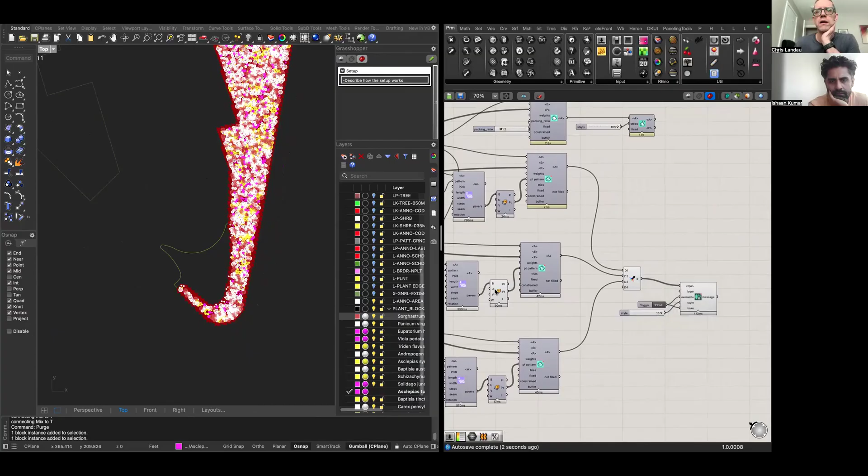Okay, oh, I think I see what I'm doing - I created a pattern based on this area and it's plugging into all these, into all of them. I need to pull this into pattern here as well, and I need to pull this into here. And then there they go - they start to appear, or they should.

So that's a good pattern, but for some reason we're not seeing anything. We have a plant list - are we getting any plants? We're not getting any plants.

So rain garden was not typed properly - oh no, it matches. Oh okay, there we go, it's working.

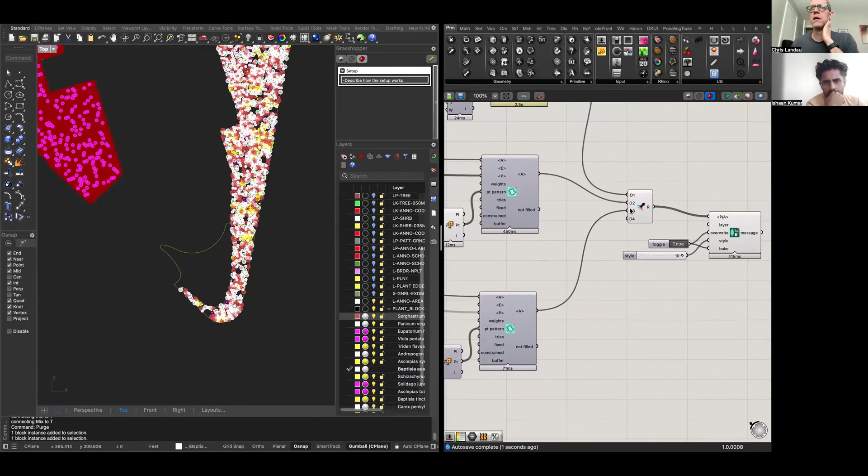So for a second there, it looked like there were no plants - strange. Okay, so hide this. This is spooky stuff, we're trying to do a lot at once - like we're trying to pull all this stuff out of one set of mixes, and so our plants are correct, our locations are correct. All right, let me just try this plant.

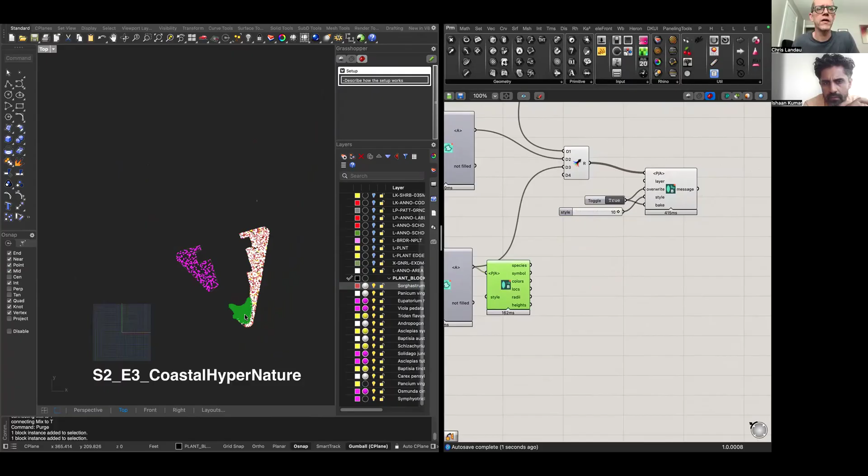Sorry, plant block info. Yes, all they're there, there are plants. I'm confused, let me do this. Let me go here, select all these, delete, and just see if... and I'm gonna do purge real fast. Did you duplicate plants? I wonder if that's a reason this is happening. No. This is bizarre, and then we've got stuff that's not showing up here now.

So I wonder if... of course, rain garden woodland, that corresponds. Info, this is why people tune in. Oops, that's not right. Block, oh.

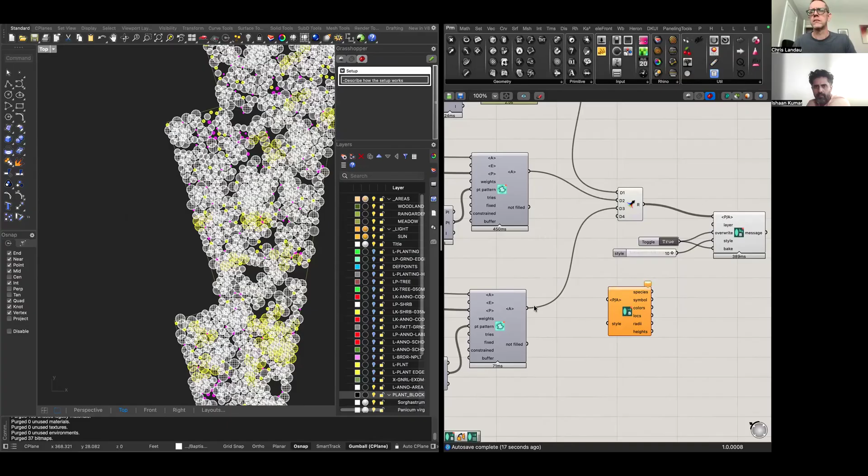So we have all of these. Again, I don't know what's happening here. So we're just gonna do the one area for now, and then we'll visualize these this way. It's very odd, very odd.

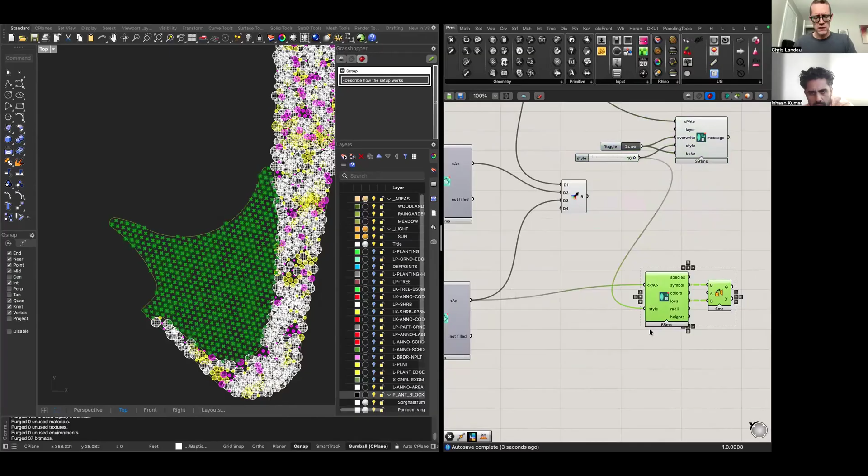So now we can see these. We're gonna do a 10 again. Then we'll do this one, and hide these. So now we can see that all the plants are there. There's something up with this bake, the way we were like, oh hey, let's just combine everything into one.

I don't know if it was a branching thing or something, or what. I thought I flattened that though. Let me just try this real fast. Flatten. Didn't work.

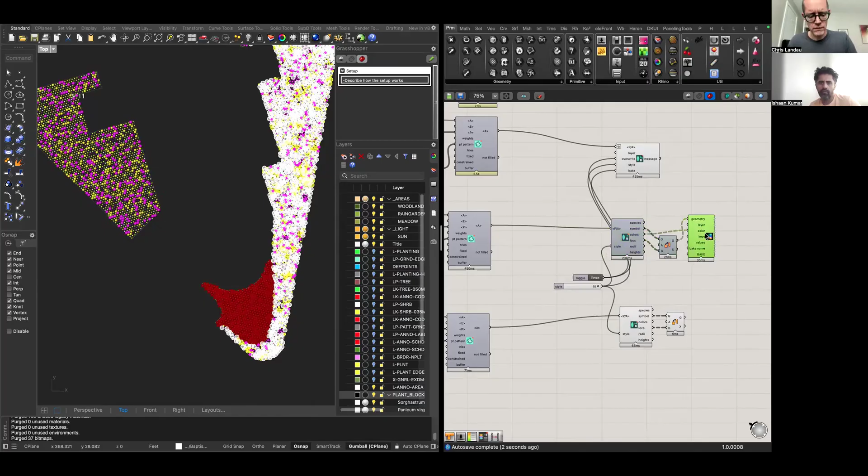Strange, okay. So we're gonna visualize this way, and I shouldn't have done that. So we'll take this, and then we're gonna do the bake plus so that we have our colors. We're doing a lot in this one little session, but I feel like it's pretty cool how much we're able to cover.

And then we have our colors, our geometries, and yeah, there we go. So we've got these different, I know they're all like the same color right now. If you want to re-download the CSV, just replace it. I changed the colors, awesome. Yeah, and you can do hex values too. Yeah, I totally did that. Download, does it need the numeric number pound? We'll see.

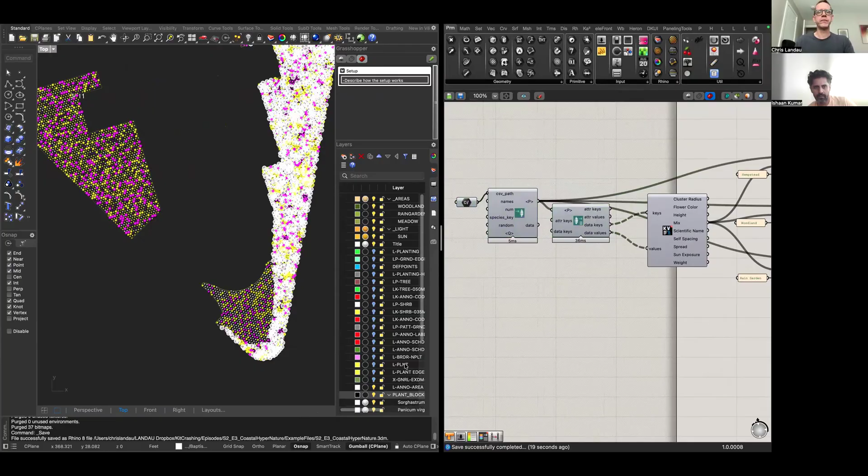Replace, save, save. And we can, like this bake plus thing, we can always bake to a specific name, right? It's just not going to bake them out as blocks, that's the only thing, unless we do something with block baking or something. I'll plug that in... and oh, here's the problem though. If it's already created a layer with the plants, like if it's baked it as a block, it's not going to show up.

But here you've done that hex value for this one plant, and so it's going to preview it. The preview will work, but the baking of the blocks will not change the color. That's what I'm trying to say. We also have this one goes up to 11, somebody said that before. Say OK, and it will change the block style.

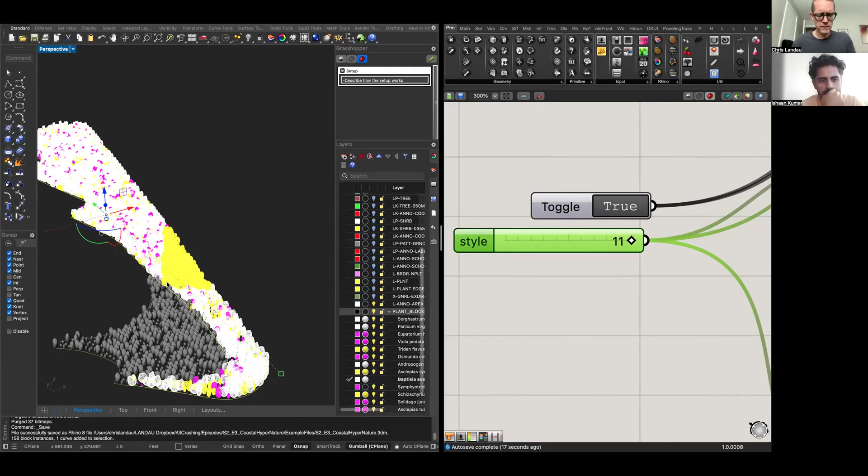So if I do... 10 and 11 are 3D, yeah, 10 and 11 are the 3D blocks. And then I can sort of visualize them like this. They're gonna show up a little bit differently. For some reason, it's flattening that preview out a little bit, might be my zoom, but there we go, it's a little nicer.

If it's grass, if you change the plant type in the data to grass, it will change the block. Or if you change it to a tree type, it will change the block. So that's kind of a nice thing. But otherwise, it's this sort of plant blob thing.

And so here the grayed out, it's not the grayed... same because it's not the same component as the one above. I think you put cyan, and that's what it was. So cyan is not a legal color. So let's just use green or blue green. Let's see if that works.

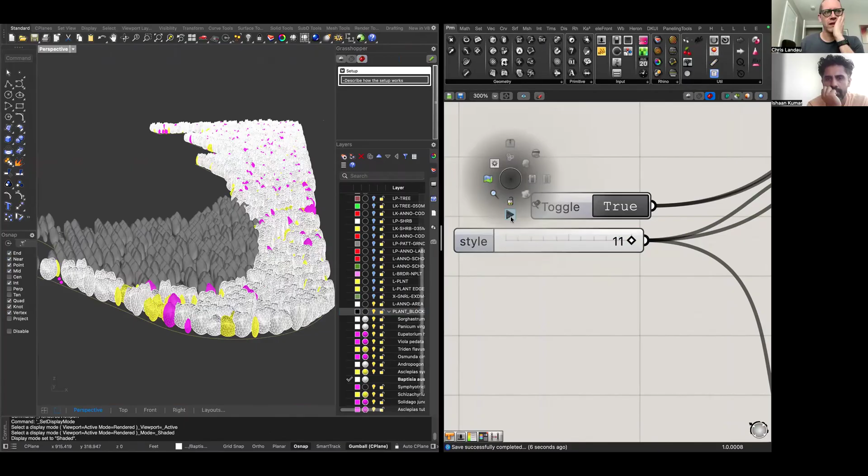We say download CSV file, and then I'll pull that. I'm dropping this right into my folder and replacing the old one. And then I can either say, this is basically most of the script when I replace that, so I can also just hit play, which refreshes the whole script. It just reruns the whole thing. And then now it should be... I think blue-green was a color. I was wrong, it's not a color. Let's just do blue.

Is there... I think you guys have a resource on the website? Yeah, if you go to LandKit, there's under the component reference, this is at the bottom of the page, components reference. We have references for all these different components. And then here under, let's see, I'm always not sure.

It's under data, create plants from CSV data. You can also search for CSV—let's do that actually, since this is the easier thing for most people. You search CSV and there it is: create plants from CSV data.

You click on that, and it tells you what are your inputs, what are your outputs. Down here we usually like to add extra information if it's a particularly complex component, and in this case there's all kinds of information about how these things work, about adding parentheses, about how months work in terms of bloom calendars, color names, and there's a list of all the color names and what they'll translate to.